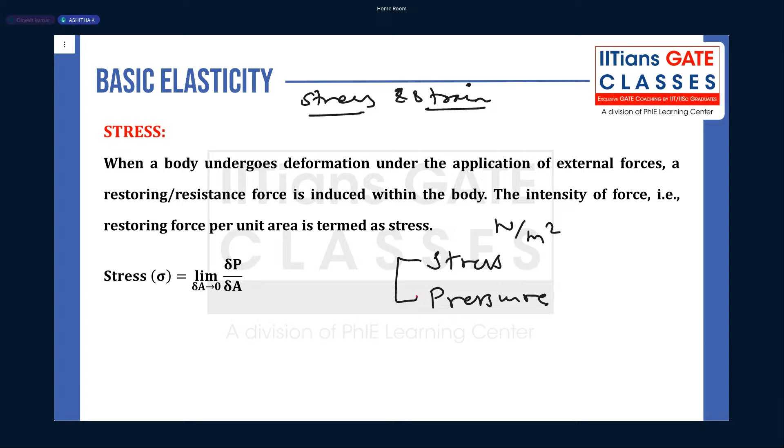Stress will act at a point, sir. Okay, stress acts at a point. Pressure also acts at a point, right? You guys have done fluid mechanics, right? In water, sir, you will find pressure at every point, right? So what is the basic difference? Physical difference. Anybody?

So basically, pressure is what? A loading, right? It is an external load, right? Yes or no? Pressure is a loading, right? Everybody agree or not? Pressure is a loading. What is stress then? Resistance to loading. So is it clear, everyone?

What is the physical difference between stress and pressure? That is one difference. Second thing: stress is what? A vector, scalar, or something else? It's a tensor. Yeah, it's a tensorial quantity. Later we will see what tensor quantity means also. But stress is a tensorial quantity, it's a second order tensor.

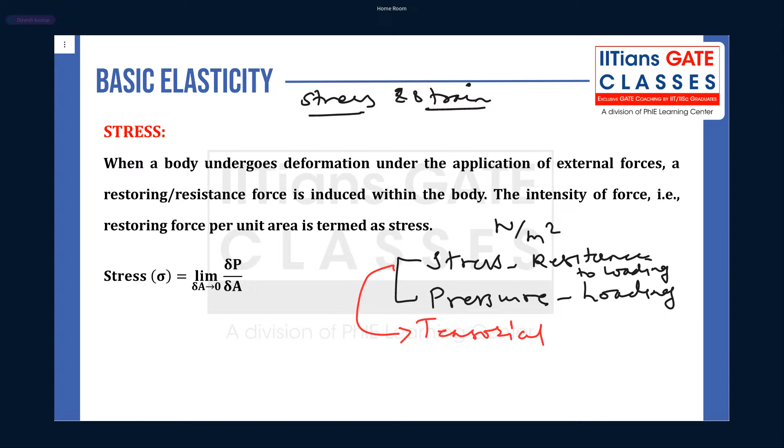Now what about pressure, guys? Scalar. Yes, pressure is a scalar quantity. Everyone, is it clear? Yeah. Now you guys understand the basic difference between stress and pressure. Everybody, yes or no?

So I am asking one question: how many of you were aware of this simple exact difference between pressure and stress prior to this class? Anybody was well aware? Others? If yes, that's good. If no, also no issue. That's good too.

So what is a tensor? See, I will explain in brief. You know vector. So what is a vector quantity, Satvik? For a vector quantity, you need two things, right? For any quantity to be a vector quantity, what? It needs magnitude, it needs what? Direction, right? For a quantity to be a vector, what does it need? Magnitude and direction, right?

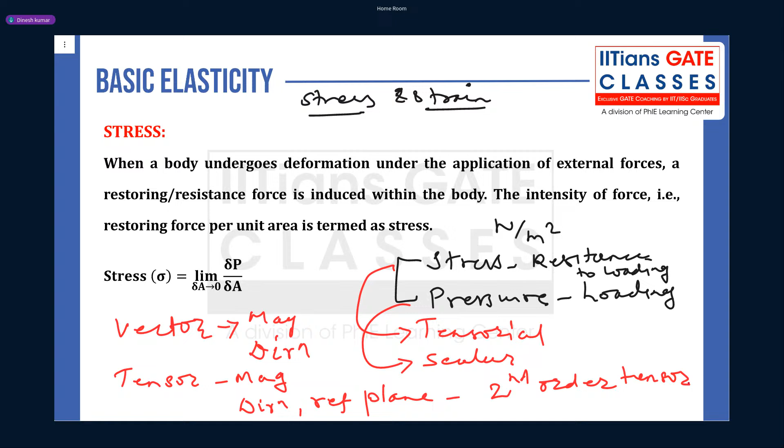Stress, right? So stress is usually denoted by what? Sigma or tau. Usually normal stress is denoted by sigma and shear stress by tau. And what is stress in general? It's the limit as delta A tends to 0 of delta P by delta A.

What does it mean? It means your stress acts at a point. Delta A tends to 0 means what, guys? In physics, delta A tends to 0 means it's a point, right?

So your stress acts at a point, but it needs magnitude, direction, as well as a reference plane. Now shear stress is denoted by tau and normal stress is denoted by sigma. So what is normal stress? It's the limit as delta A tends to 0 of delta Pn by delta A.

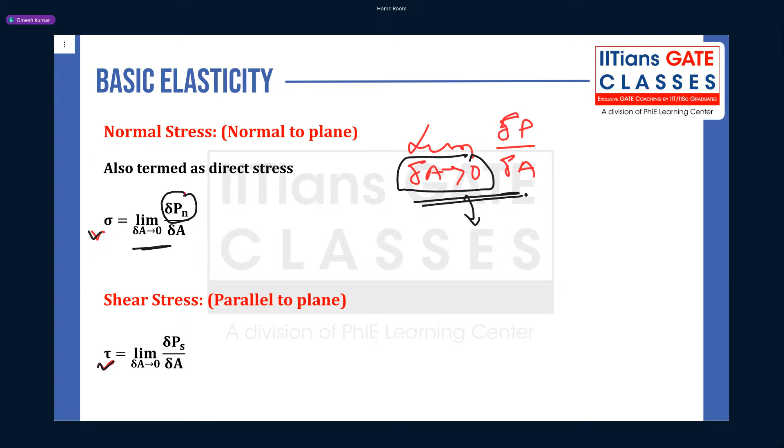So guys, what is delta Pn? It's the normal force to a surface or a plane.

Suppose this is my plane, and on this, if there is a force which is inclined by theta angle, there will be a normal component and a shearing component of this. This shearing component of the force inclined from this plane, and the normal component of this inclined force delta P, gives us normal stress, and the component along this plane gives us shear stress.

If you want to draw this a little more clearly, I'll just draw it. So to understand how this normal and shearing force works, you can take this as my in-plane, and perpendicular to this is another axis.

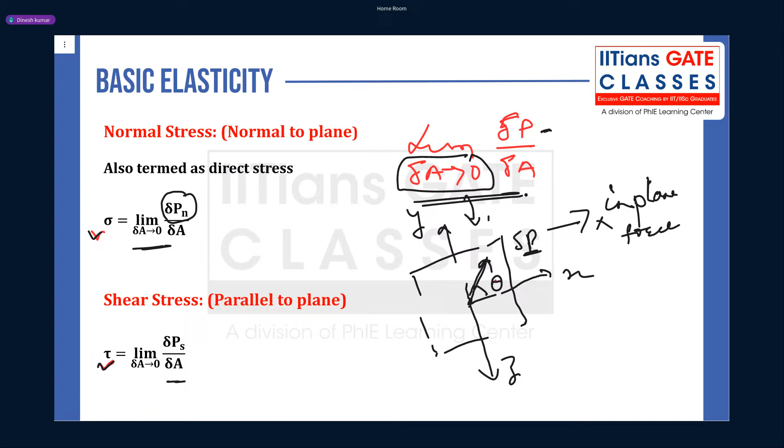Now, since delta P is not in plane, that means it will have some angle with the x-axis, some angle with the y-axis, and some angle with the z-axis also. But in a simple way you can understand: there will be one component which is the in-plane component, and then there is a normal component. So you have normal stress and shear stress.

Now guys, in basic elasticity, how do you denote your stress? As I told, it is denoted by sigma ij or tau ij. So your stress is denoted either by sigma or tau—sigma usually for normal stress and tau for shear stress.

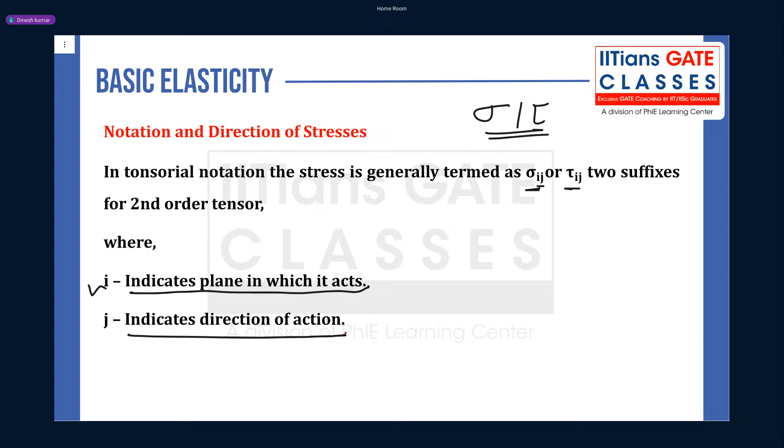But when you come to mathematical notation, your sigma or tau, both can be denoted as stress, along with i and j. What does i represent? It represents the plane in which it acts, and j represents the direction in which it acts. That is the meaning of this sigma ij or tau ij.

Now guys, when is this sigma ij or tau ij a normal stress? Can anybody tell? So when i equals j, or tau ii, when both are same—Satvik, when both are same, like what? Sir, when both are same, like sigma xx or tau yy, something like that. So how do you say? If i equals j, then it is normal stress.

And if i is not equal to j, then it is shear stress. Clear?

Everyone, is it clear? So it is not like if I write tau xx—what is this? Is it shear stress or normal stress? Anyone? Because in your GATE exam, in some questions, especially in GATE Mechanical, they have confused this. So tau xx is what? Normal stress. Why is it normal stress? Anyone? Why is it normal stress, Mr. Satvik or Krutik, Mohit, Dhaneshwar, Chahid, Ashita, Saurav, Aditya?

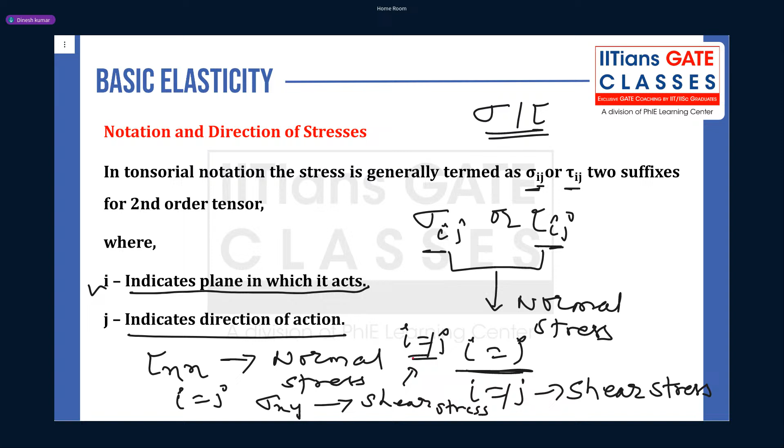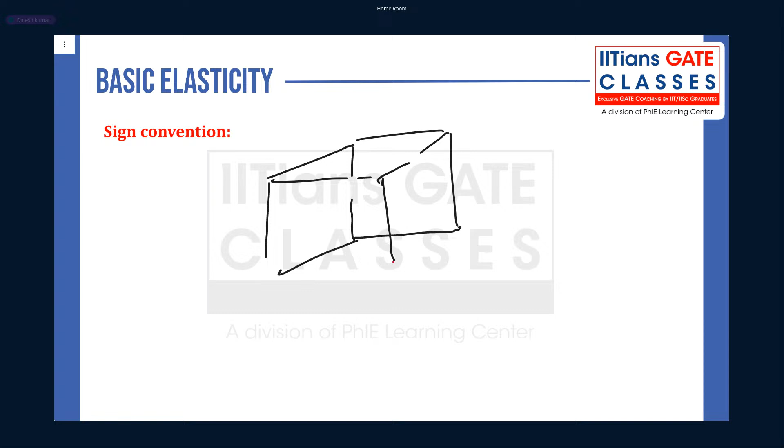Now we need to discuss direction or sign convention. So how is the sign convention done, guys, for stresses? If you take your cube, a three-dimensional stress system, let's make a cube. Clear? It's a rough cube.

Now suppose you are taking this face, and here this is the x axis, this is your y axis, and this is the z axis. Now I am talking about this plane or face, ABCD. So what is normal to this, guys? What is normal to plane ABCD? Anyone? Sir, X axis, right? X is normal to that.

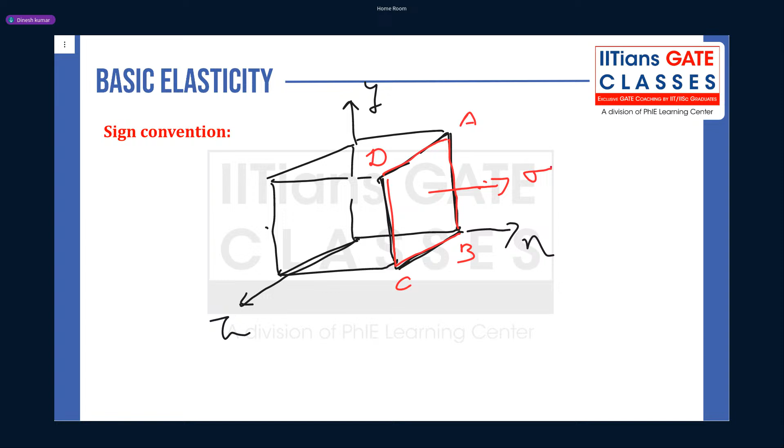So what will be your normal stress here? It will be sigma. Then what is i? The plane on which it is acting. So what is the plane? It's an X plane. What is the direction? It's an X direction. So what is your normal stress? Sigma xx.

Now guys, once you know your normal stress, you need to know about your shear stresses. Now how do you decide the direction of shear stress? It's a very simple funda. See, if your normal stress is going in positive x direction, the corresponding shear stresses will also go in positive axis direction. So first, what is your shear in y direction? It will be in positive y direction.

Now what will that be? First, it is sigma. What is your plane? It is x plane. And what is your direction? It is y direction. So it is sigma xy. Now second shear stress, which is along z direction, so what will it be? It will be sigma, the plane on which it is acting is x, and the direction is z.

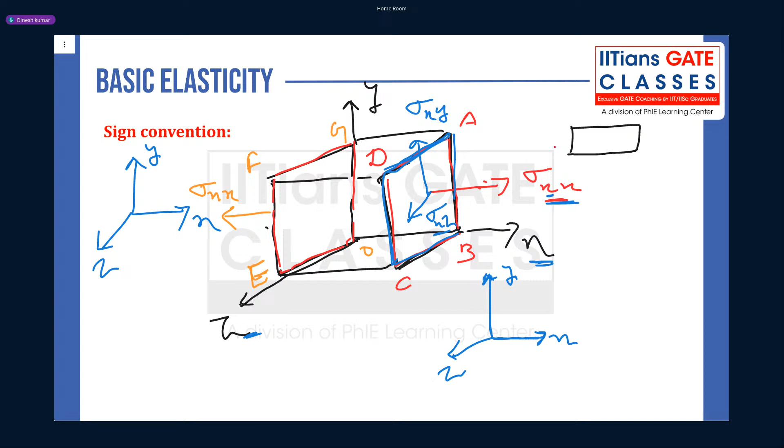Because this stress is going away from your surface, right? Any stress which is going away from your plane or surface is tensile stress, right? It is going in negative x direction, but it is going away from the surface, right? So it's a tensile stress.

Now guys, you know this sigma xx. Now tell me, what will be the corresponding shear stresses? Anyone? In what direction? The corresponding shear stresses, yes, these will be in the respective negative axis direction. That means your sigma xy will be downward and your sigma xz will be in negative z direction. Clear? Everyone, is it clear?

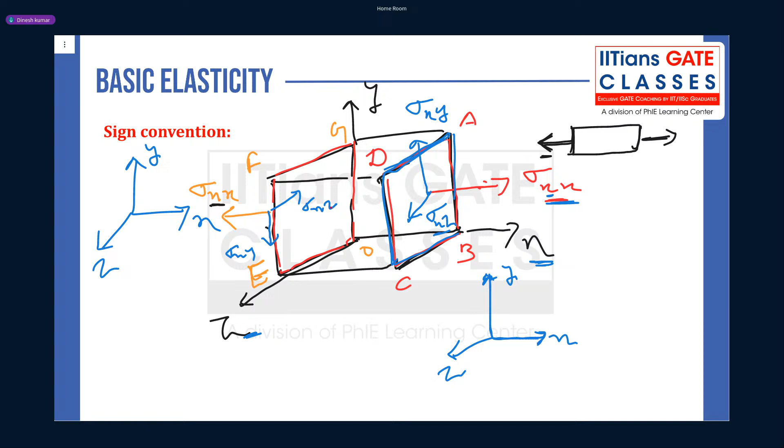So that's how we decide sign convention for stresses. If your normal stress is acting in positive axis direction, then the corresponding shear will also be in positive axis direction. And if your normal stress is acting in negative axis direction, then the corresponding shear will also be in negative axis direction.

Now guys, so if you write your stresses on a three-dimensional body, it will look like this. Everyone can see this. On all 6 planes, we can see how your stresses will be acting. Is it clear? So you guys can see now, total how many stresses can you see on this cube? How many total? 18. 18, huh?

Total how many can you see? This is an infinitesimal small particle, meaning it is at a point. So how many stresses can you guys see? There are total 9.

These are sigma xx, sigma yy, sigma zz - these are normal stresses. And then you have tau xy, tau yx, tau yz, tau zy, tau xz and tau zx.

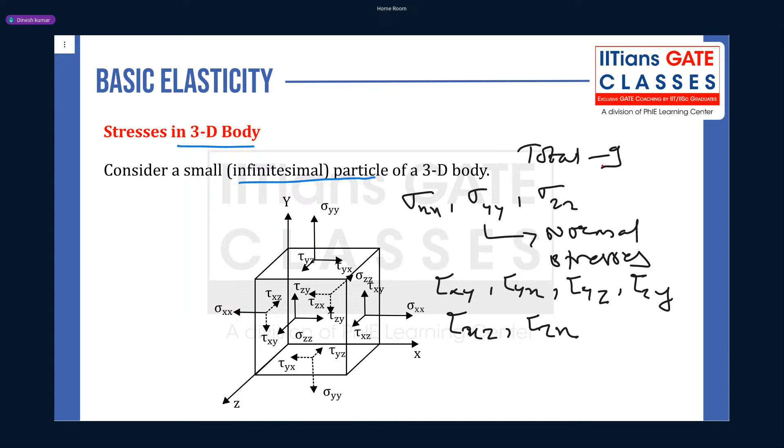So total 9, but out of 9, how many are independent? Total 9, and out of that 6 will be independent. Why 6 will be independent? Because from equilibrium equations we get tau xy equal to tau yx, tau xz equal to tau zx, and tau yz equal to tau zy.

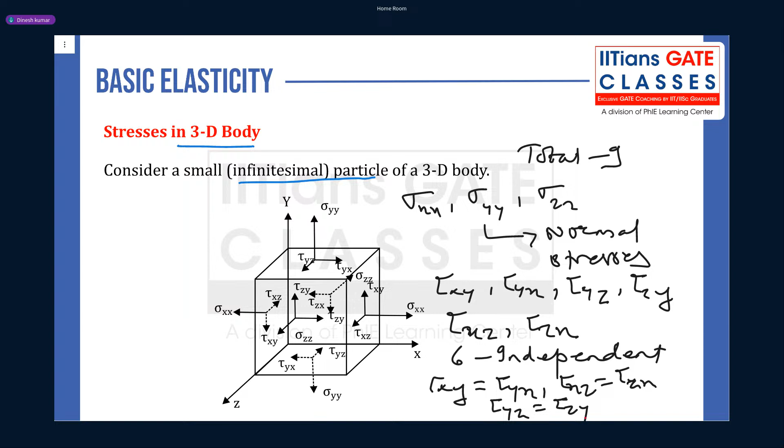So this is about three-dimensional stress system. Now this can be written in matrix form: sigma xx, sigma xy, sigma xz, sigma yx, sigma yy, sigma yz, and sigma zx, sigma zy, sigma zz. Row indicates plane and column indicates direction. Out of these 9, 6 are independent.

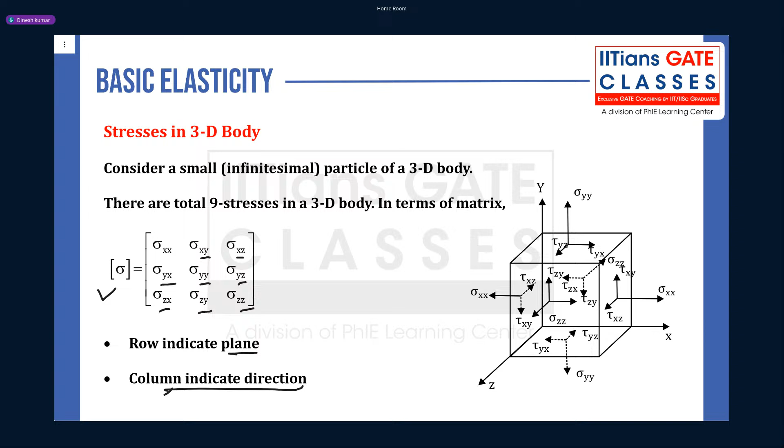Yes or no? This is the three-dimensional stress system. Now further I will not go into stress transformation and other things. We'll move to the 2D stress system. For 2D, this is the xy plane.

On this 2D stress system you have sigma xx. Since it's positive in the x direction, the corresponding shear is in the positive y direction. This is sigma xx, a positive normal stress going in the negative x direction has corresponding shear in the negative y direction. This is sigma yy, going in negative y direction, with corresponding shear in negative x direction. This is how you write the 2D stress system.

In matrix form we write sigma xx, sigma xy, sigma yx, and sigma yy. We know sigma xy equals sigma yx, so sigma ij can be written as sigma xx, sigma xy, sigma xy, and sigma yy.

So how many independent stresses are there for a 2D stress system? There are total 4, but out of 4, independent ones are 3.

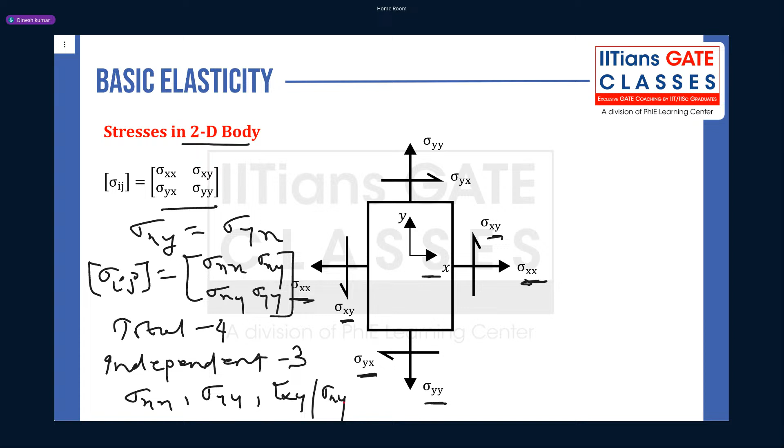Next is equilibrium equation. I am not going to do any derivation here, I'll explain what equilibrium equation is and then give a question. In a body or structure, your load will be varying. If you move from one point to another, will the load be the same? No, the load will be varying.

When your load is varying, your stress will be varying. But in a body there needs to be an equilibrium of forces, right? So if forces are in equilibrium, and stresses are resultant of forces - if you multiply stresses with area you get force, and those forces would be in equilibrium.

So on a 2D stress system, what all stresses do you have? You have normal stresses, shear stresses, and along with that, for any body there will be some body forces. Why body forces? Due to gravity - because any structure will have its own mass, and that mass into gravity will be the body force.

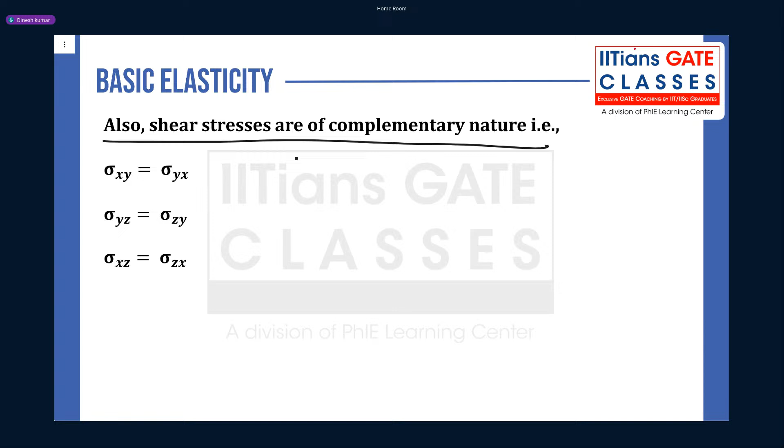And before that, if you take moment equilibrium for this stress system about the z axis, sigma mz, if you do, you will get these conditions. These conditions are the complementary nature of shear stress.

Satvik, are you clear why this differentiation is there? Dou by dou x sigma xx plus dou by dou y sigma yx plus capital X equal to 0 is one of your equilibrium equations, right? Are you clear or not yet why it has come in differential form? Equilibrium equation, it is just from equilibrium in simple mathematics.

How has it come? You can see the previous figure. If you see this previous figure, I'll just give the sigma fx equal to 0. Just can you try, Satvik, here? If you take sigma fx equal to 0, take it. What you see is the force in x direction.

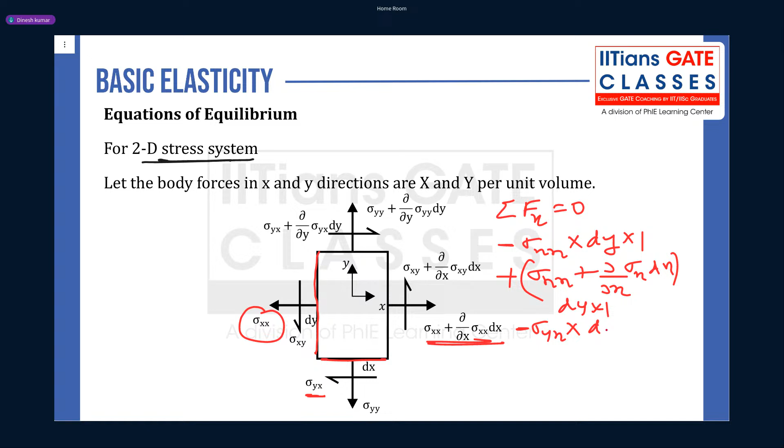Now guys, another force will be due to this shear stress, and it is going in negative direction, so it is minus sigma yx into the area, this dx into 1. Now this shear stress is going in positive direction, so the force will be positive, so it is sigma yx plus dou by dou y sigma yx into dy. Now area is dx into 1.

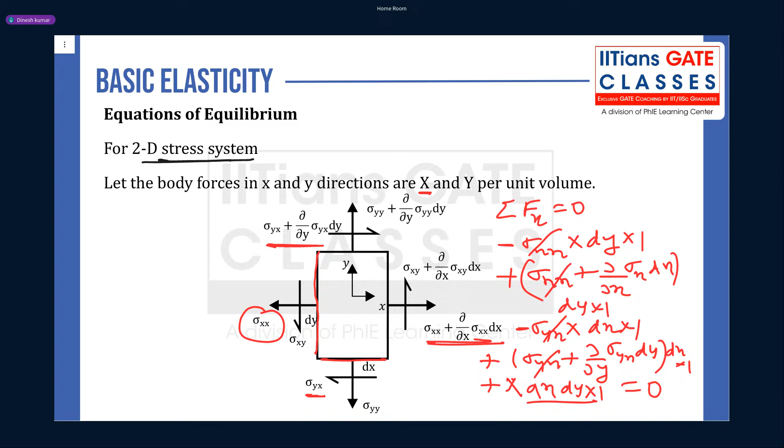Now apart from this, what other force do you have? You have body force, so it will be added, and it is capital X into dx into dy into 1, so that means this is volume, and this is equal to 0. Now you can see this will get cancelled, this will get cancelled, and throughout you can take dx dy out. So you get this equation, which is one of your equilibrium equations for 2D stress system.

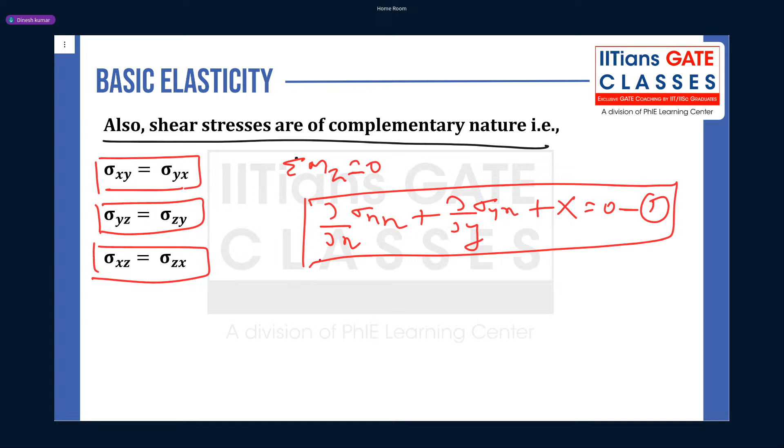Okay, same way you can write your equilibrium equation in y direction, which will be dou by dou y sigma yy plus dou by dou x sigma xy plus capital Y equal to 0. So it is your equilibrium equation in y direction.

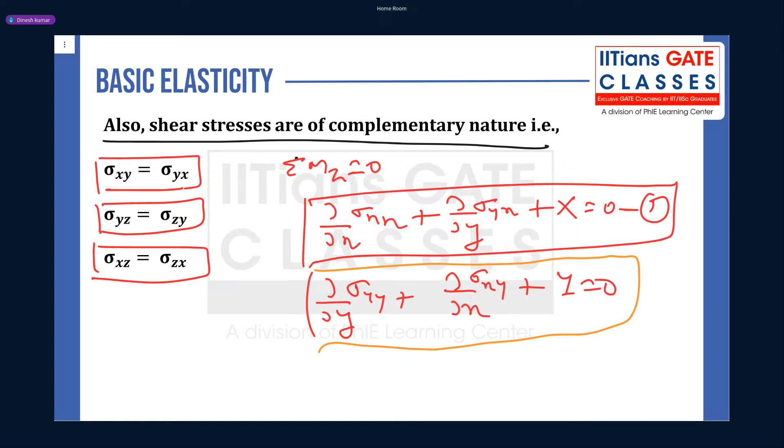Okay, now we have discussed about 2D stress system, so I can write equilibrium equation for 3D stress system also. Similarly, how you can write? There will be an additional z term. So you can see here, for 3D, the additional dou by dou z sigma zx is there. Same way, here this additional dou by dou z sigma yz is there. And then in z direction, you have dou by dou z sigma zz plus dou by dou y sigma yz, plus dou by dou x sigma xz plus capital Z equal to 0. Clear everyone about this equilibrium equation? Yes or no?

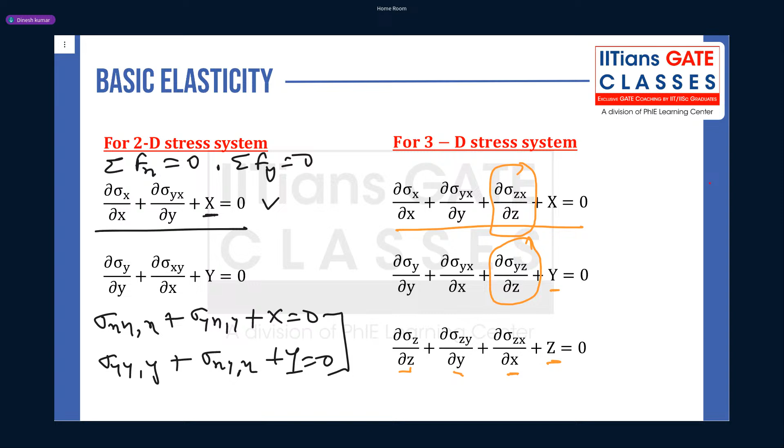So this is just a demo class. I am not going into the derivation part. Just I want to tell you what you guys mean by equilibrium equation here in basic elasticity. Quickly guys, respond yes or no. Okay, thank you. Let's take one GATE question from a recent year.

So what is the question they asked in one of the previous GATE papers? The components of stress in a body under plane stress condition, in the absence of body forces, is given by sigma xx equal to ax square, sigma yy equal to 12x square minus 6y square, and sigma xy equal to 12xy. Find this coefficient a such that the body is in equilibrium. Guys, can you try this question quickly?

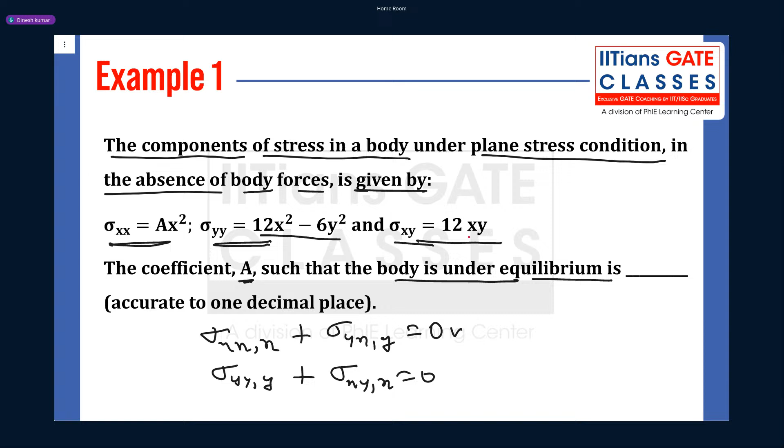No, no, I am doing this wrongly. Sigma xy is not 12x square minus 6y square - this is sigma yy. Sigma xy is what? It is 12xy. So guys, substitute 12xy here, and when you differentiate with respect to y, what do you get? 12x.

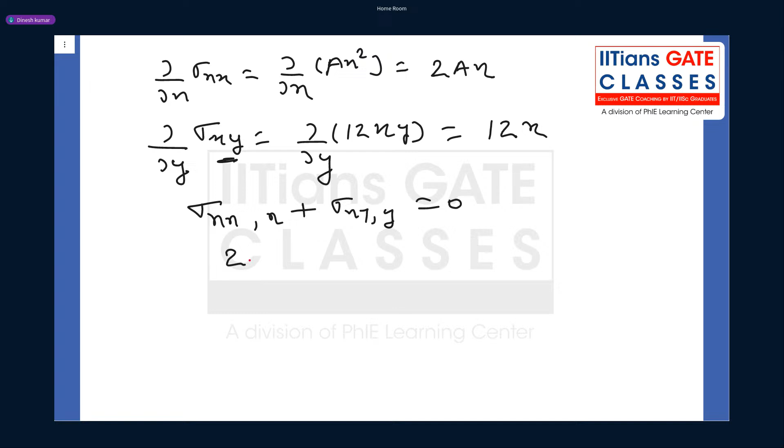Now what is your equilibrium equation? It is sigma xx comma x plus sigma xy comma y equal to 0. So what do you get? 2ax plus 12x equal to 0. So from here, a equal to minus 6.

Clear everyone? So what is a? So a equal to... Aditya, earlier we took sigma yy instead of sigma xy. So be careful guys, this kind of mistake happens in the exam. So a is minus 6. So minus 6 is the answer.

Now guys, second equilibrium - if you check the second equilibrium equation, which is what? Sigma yy comma y plus sigma xy comma x equal to 0. So that means, if you check second, what do you get?

If you differentiate this with respect to y, what do you get? You'll get minus 12y, and if you differentiate this with respect to x, you will get plus 12y, and this equals 0. What does it mean? It is 0 equal to 0. That means this is satisfied.

Clear? So this is not required, I am just doing it for a check. Okay, means your given stress system must satisfy both equilibrium equations, in the x direction and also the y direction, then only your system is in equilibrium. Clear? So that's how the GATE question comes.